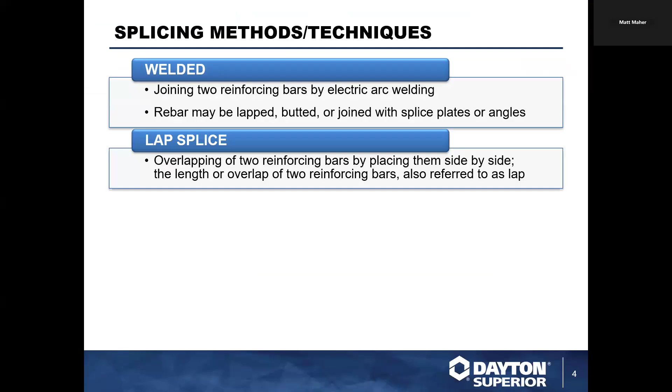The three main techniques we're going to see are welded, lap splice, or mechanical. Welded is exactly what it sounds like: you take two reinforcing bars, sit them side by side, and with an arc weld you join those two bars together.

They can be lapped, they can be butted, they can use plates or angles. It is an expensive process, it is a time-consuming process that I'd say is not as frequently seen anymore, but just two months ago I had a set of plans come across with welded splices that the engineer wanted me to review. So it's rare, but still out there and used depending on what the situation calls for.

Lap splice is the most traditional splice that we're going to see. That's what everybody sees in paving, especially a lot of wall work, anywhere. It's just the overlapping of two reinforcing bars where you put them side by side, and you have pigtails or tie wire or a max tie gun or a Cody clip gun that puts your two bars together. That is dependent on the size of the bar for how long that overlap is and what you need to develop the strength of the connection.

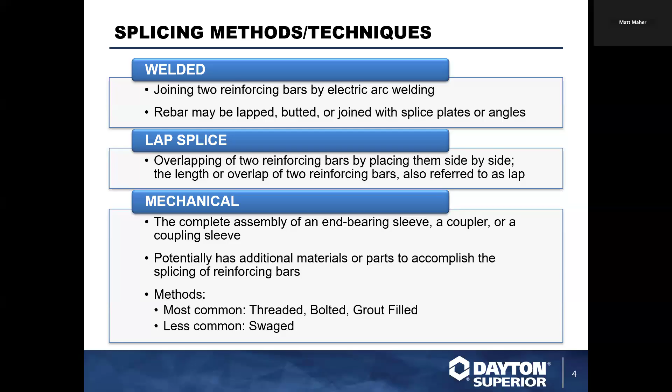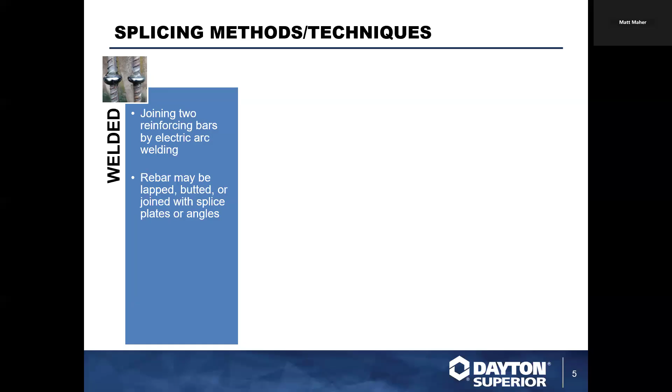There is one company in the market that uses that almost exclusively, but they've gone to some other methods as well. Just to give you some visuals and a couple more notes: for our welded splice, this is a picture of just doing it butt to butt, done again through electric arc welding, maybe lapped, butted, or joined with angles or plates.

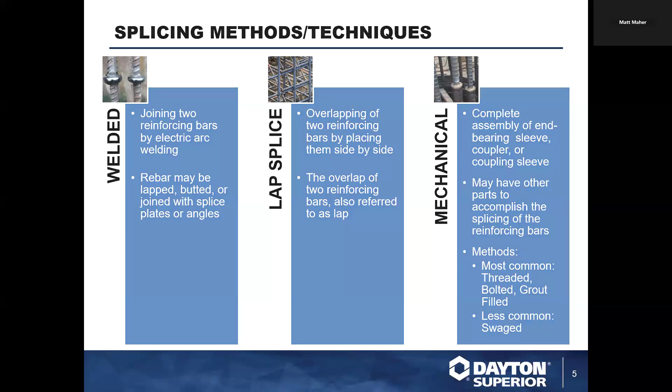Your lap splice is traditional, just side by side rebar with wire holding it together. And then you have your mechanical splice that uses a separate function. The one we'll talk about today is a threaded version. Most people are familiar with a bolted connection. There are also grout-filled connections predominantly used in the precast industry, and again the less commonly used swage.

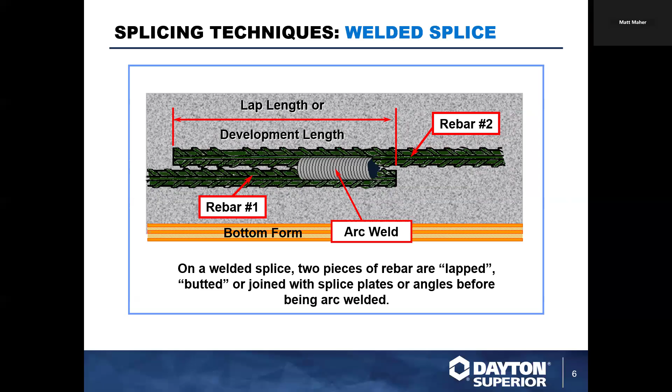So looking at an overview of everything here: welded splice, to walk you through it - rebar 1, rebar 2, put an arc weld after you figure out what the development length is. That weld would actually be almost the full length of that lap to hold those bars together. This is going to be dependent on how good your welder is and on the concrete that's holding it together. So those are things to consider.

Here again, a traditional lap splice held together by tie wire. You've got to figure out the developmental length for the lap to make sure you're getting full capacity of the bar, or as close to full capacity as you can get. This is highly dependent on the concrete and highly dependent on the installer, because some job sites I've been on put pigtails every 3 inches, others have tie wire every 10 inches, and some have one piece of tie wire holding bars together. It just depends on who's doing the installation that day and how many wires they felt like putting together.

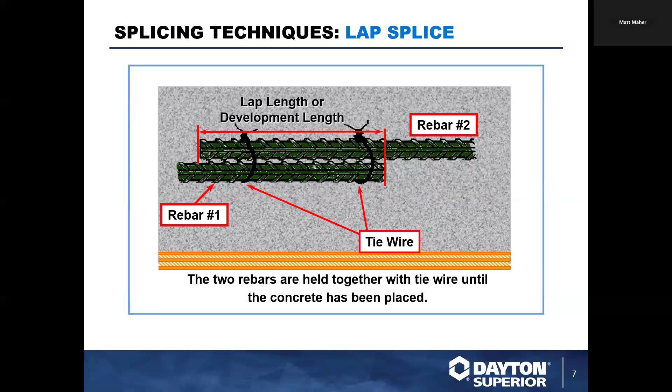There's no standard for how much tie wire should be at a given interval. So it's dependent on the installer and the concrete for how secure this is going to be and what kind of strength it gives your structure. Obviously, between those two, you can have some failures because they're dependent on the installer, dependent on the methods used, and dependent on the concrete holding them together. So some of the issues you'll run into are movement failures.

One of the biggest issues you'll run into with a situation like this is what we call rock pockets. That's where all the slurry from the concrete flows through, but the aggregate is held up by the rebar, and you get a weaker structure because the aggregate is part of the support and everything doesn't work together. You're not getting the right blend of concrete throughout the structure, so you wind up with weak spots and eventually a failure. Congestion is a big concern.

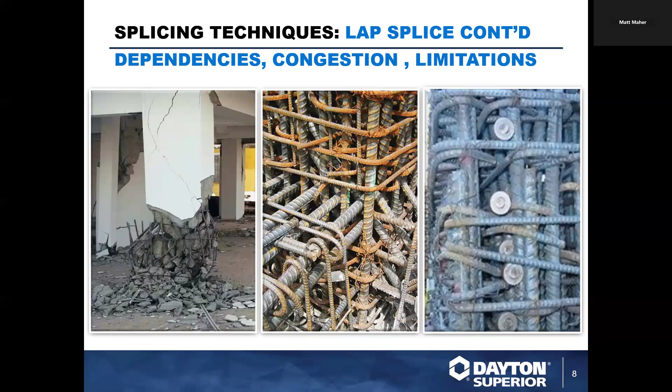It's becoming an even bigger concern as environmental factors come in and people are starting to look at carbon content and stuff like that.

So the answer to all of that, whether it's installer questions, concrete support questions, or congestion questions, is to use a mechanical splice — again, the complete assembly of an end-bearing sleeve coupler or coupling sleeve. Basically, a mechanical coupler allows two separate bars to behave like one large bar. If you have a drilled pier shaft with two 60-foot bars and you couple them together, they will act like one very long 120-foot bar.

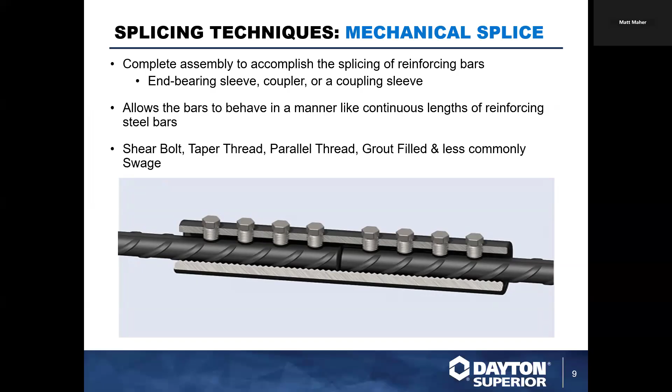Our most common methods are shear bolt, two threaded options of taper thread or parallel thread, and then grout filled and swage.

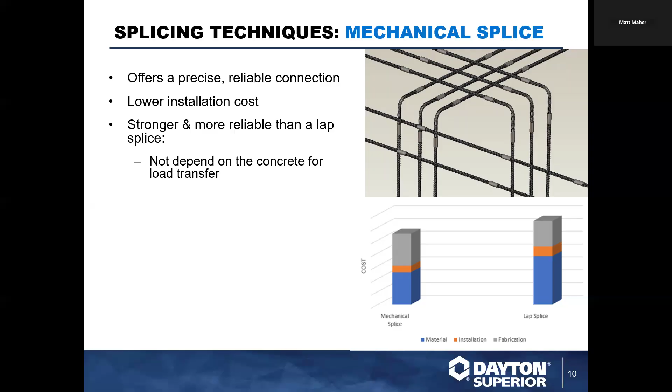The advantages here are that they offer a precise and reliable connection — the same connection every time. They have a much lower installation cost and a much more precise installation. They are stronger and more reliable than your other two forms of lap splicing, and not dependent on the concrete for load transfer.

That's a big thing. All, or the majority, of the testing for mechanical couplers is done in a lab outside of concrete, independent of any outside forces, so that we as a manufacturer, and whatever regulatory force is overseeing the project, are assured that the mechanical couplers will cause the rebar to act the way the rebar should, without variables dependent on any outside force.

As a result, you get a stronger connection, superior cyclic performance, and greater structural activity during seismic events. That's really important — the performance of mechanical couplers in seismic zones far outperforms regular lap splices or welded splices.

And this last note here is correct and not correct. So we're going to dig a little bit into the current situation.

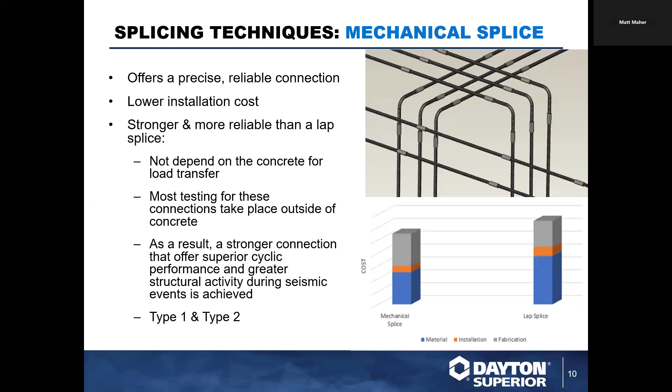Typically, for the last 40-ish years, there have been type 1 and type 2 connections for mechanical couplers — 125% of the yield of the bar, and 100% of the tension of the bar. So that's these two definitions here.

Type 1, as defined in ACI 318, is a full mechanical splice that gives you 125% yield of the bar. Type 2 gives you that same 125% of yield, but also gives you 100% of the tensile strength of the bar.

Now, why I say this is correct and incorrect is because at the beginning of this year, ACI 318-2025 came out with S, G, and L classifications and did away with the type 1 and type 2 designations for mechanical splices. In doing so, they kind of shook up the industry a little bit.

Currently, no manufacturer has any coupler that will meet a Class S splice as defined in ACI 318-25. The majority of us, including Dayton Superior, can comply with Class G, and we have several that can comply with Class L.

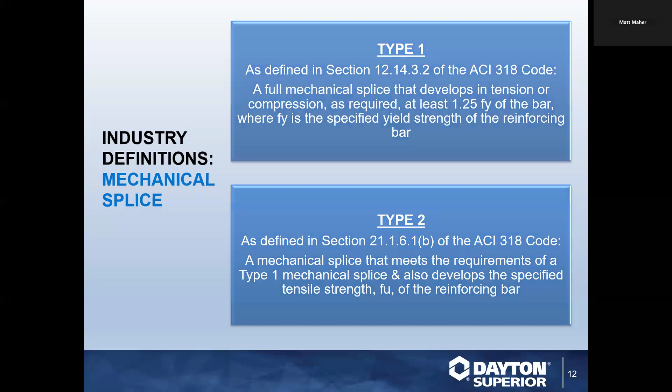But if you are an engineer doing everything to ACI 318-19 and previous, then you would still use type 1 and type 2. If you are designing to ACI 318-25, you would have to use Class G, L, or S. But again, nobody on the market has anything that will hit a Class S as it is currently defined in ACI 318-25. So hopefully that clears all of that up. If you guys have any questions about that, throw it in the chat and we'll address that at the end.

This slide shows how those ACI and ICC code requirements work together and what it means for the difference between a type 1 and a type 2. On grade 60 rebar, type 1 is 125% of yield, which is 75,000 PSI, and 80,000 PSI for type 2, which just means it takes 80,000 PSI to pull on a bar typically and get it to break.

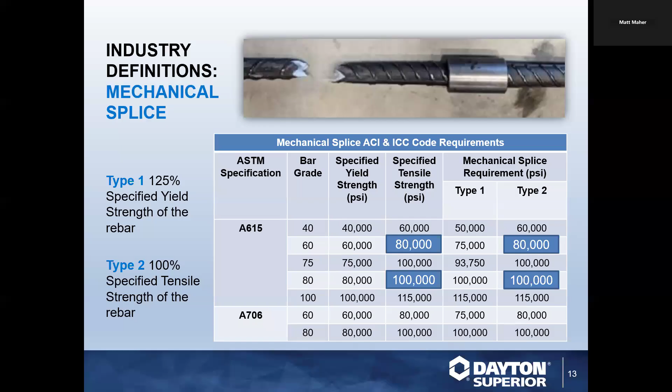So a mechanical coupler has to allow two pieces of bar to perform in that same method and not allow the two bars to pull apart in anything less than full tension. All DSC splices are good in both compression and tension. Compression is the force pushing on the bars, and tension is the force pulling on the bars.

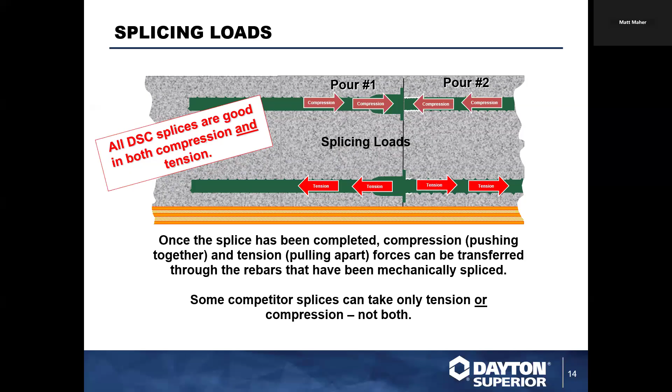Once that splice has been completed, the forces are transferred through the rebar that's mechanically spliced rather than through any other method. One thing to be on the lookout for when considering Dayton Superior versus anybody else on the market: several of our competitor splices can only take tension or compression. They're not qualified or approved for both. Again, all DSC mechanical splices are approved for both tension and compression.

So walking through some of the final definitions here, some general technical information before we get to the DBDI: what is yield strength? It's the stress to which a reinforcing bar can have a load applied to it and will stretch. Once the load is removed, it will return to its original length. It's designated by FY, and once it's reached its yield point, it's been elongated or stretched and will never return to its original length.

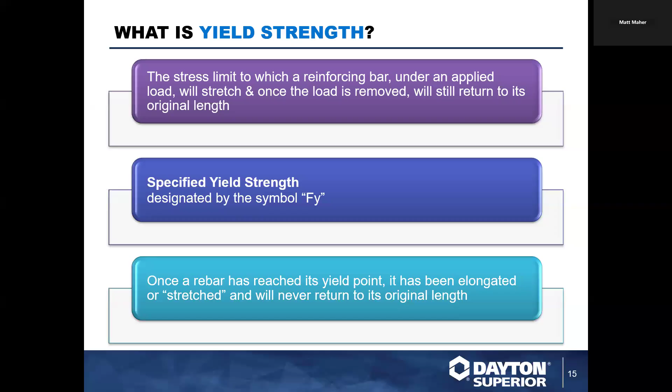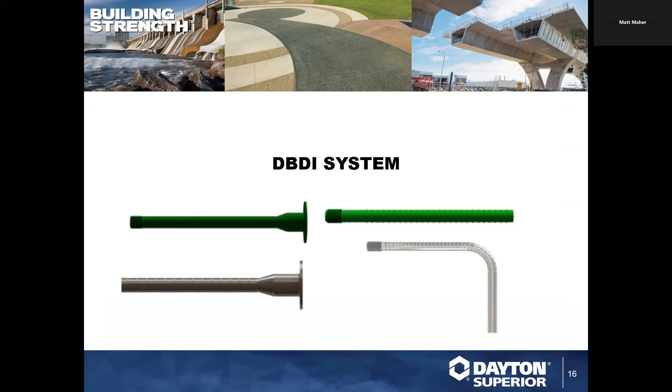You'll see what they call necking, which is rebar that has been stretched out and no longer looks like rebar — it's got a concave portion to it. That's all of the technical stuff, all of the humdrum, boring stuff. Now we get to the exciting stuff of the DBDI system.

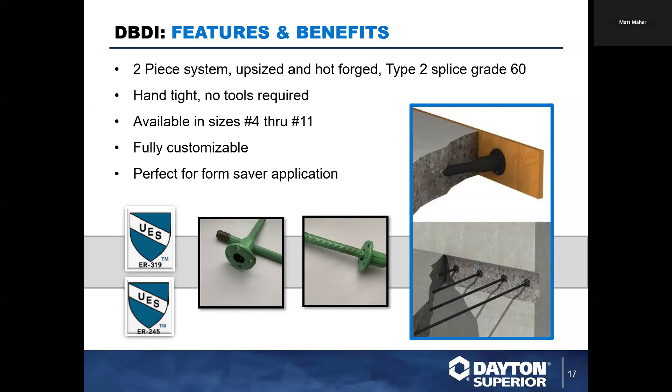The DBDI system is our parallel thread system. I would say it's our flagship parallel system. I love this system and the way that we put it together. It's two pieces, and the biggest thing I tell people is that the second part — it is upsized and hot forged. So everything you see here in these pictures and diagrams, these are all one piece of bar. The male side is heated and upsized, and then the thread is cut into it.

Same with the female side. That flange is not welded on, not tacked on, not screwed on or anything like that. It is one piece of bar that is heated up, the end is formed into the flange, and then it is tapped for whatever size rebar it needs.

Because of that upsizing process, because we take the time to do that, it does provide a type 2 splice for grade 60 on all sizes 4 through 11. So there's never a question of whether you're getting the full capacity of the bar, or the best mechanical splice for what you're trying to do. It is as strong as it can be, and as strong as a mechanical splice can provide you in just a two-piece system.

It's hand tight, meaning no tools are required. So it's a great option for projects with quick-moving parts where you've got a lot of guys on the ground.

Installers don't have to be trained. They don't have to have any special equipment. They don't have to know anything. You can just grab the guy that just walked onto the job site that day and tell him to start screwing these together, and as long as he gets them hand tight, he really can't screw it up.

They're fully customizable. We'll walk through that here in a second, but that means we can do a litany of things, from single-ended to double-ended to hooks, to a crazy Z-bar we see down here in Texas all the time that my customer service people love to encounter, with double bends in it and all kinds of things.

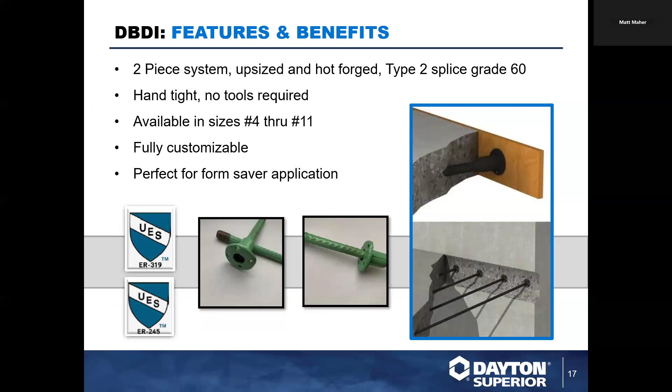Because of the natural flange that comes out of the forging process, this is perfect for a form saver application. One benefit, obviously, is it eliminates any of what you see here. It eliminates bars from protruding out of a wall. Those are a safety hazard. They're punching holes through forms. There's all kinds of issues that come along with bars sticking out of a wall.

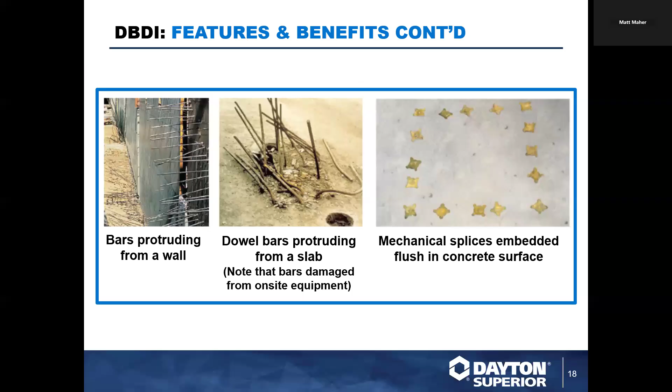Instead, you could have the picture on the right with mechanical splices embedded flush in the concrete surface. People can walk over it. People can drive over it. There's no safety hazards on your job site. Your safety inspector is going to love it. And when you're on to the next phase, you just pop in the male bars and you're good to go.

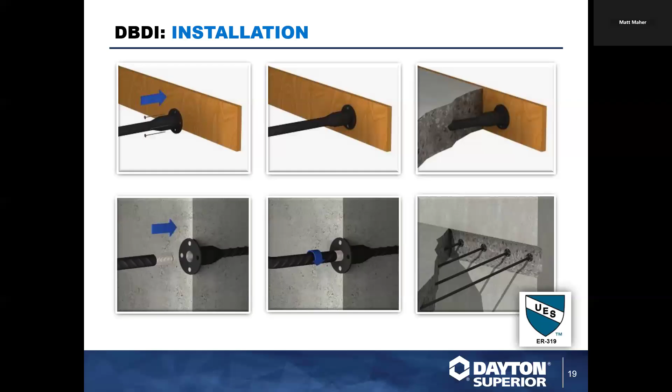So I mentioned earlier these are fully customizable. What exactly does that mean? It means that you can do whatever you want with it.

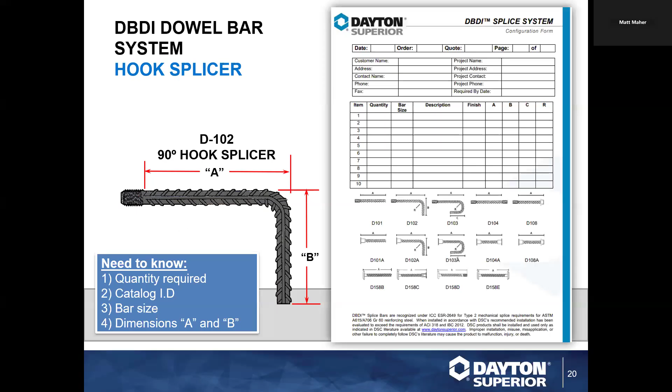So these are examples of hooked bars. This is a simple 90-degree hook bar, but as you can see on the order form there on the right, we can do 180 hooks, we can do males, we can do females, double male end, double female end, with end anchors, with bolts, almost anything you can think of. I've had people throw a lot of stuff at us and we've been able to do it. So there's not really any question there.

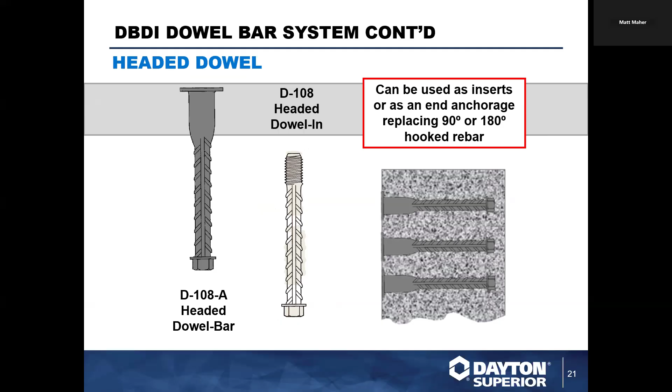One of the more popular things we see is a single-ended headed bar. This happens to be our bolt head version, used frequently in nuclear power plant applications. You can do that on a male or a female. We also have an end anchor version of it with just a regular end anchor on that. We'll get to that in just a second.

When we looked at what he was doing and how he was connecting it, the easiest and best solution was to put D104A double-ended splicers in the cavity he had, let that be poured, and then he could come back with males on the other side. This allowed his project to streamline installation speed and reduce congestion.

Never hesitate to reach out and say, hey, we're running into an issue, we've got a question, can you guys help us figure this out? I always joke when making presentations that I may not be an engineer, but I've been around enough of them for the last 15 years that I can speak the language and usually help. Then you've got guys like Sean on the call who can talk a lot more engineer.

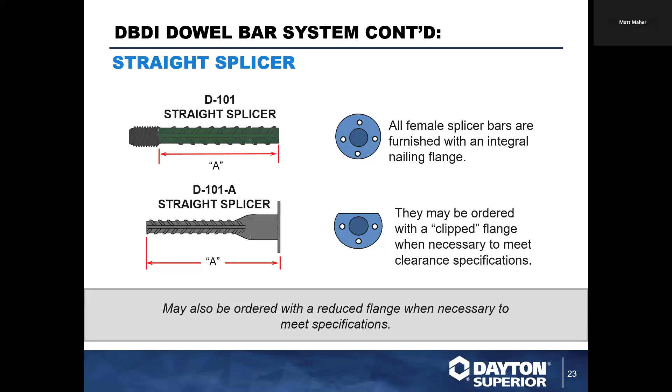So straight splicers, these are our bread and butter. These go out every single day across the country and across Canada. Our D101 and D101A, all of the female splices have this integral flange that's just a natural part of the forging process. We can also do it with a clipped flange if you need that to hit some clearance specifications. These are easy to roll off the line in standard lengths - 18, 24, 36, 48 - and they can be done up to, our handbook says, 40 feet. I'll tell you from conversations I've had, they don't like to do them over about 35 feet, but I've gotten them to do longer. Most of the time you don't need that, but you can get these in pretty good lengths as you need.

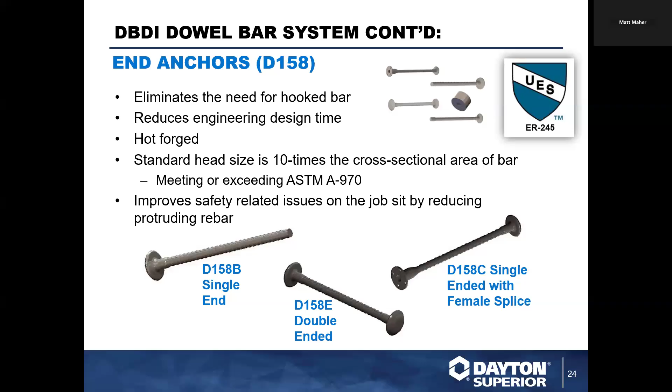The standard head size on these is 10 times the cross section of the bar, and it meets or exceeds ASTM A970. If you have any questions about code compliance, you can reach out to myself or any of the other TSRs and we'll help you with that. This also improves safety-related issues - you don't have protruding rebar, you don't have hooks everywhere, anything like that.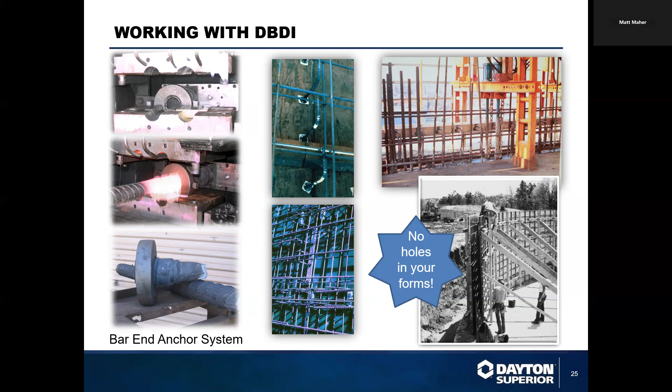This is just some photos to show you exactly what we're looking at when we talk about that heating and upsetting process, the forging process, and some of the customizations we can do. You can see in the center those are double females, for either a ladder application or just for needing multiple bars connected in close succession. We can do those double females, all kinds of options available to you with the system.

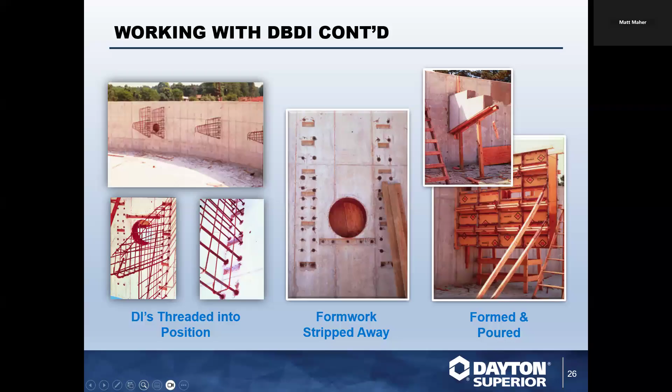You see a lot of these products being used on wastewater treatment plants and parking structures.

So what we have for resources, we've got on our website at DaytonSuperior.com all of the product pages for all the products we've talked about here today that Matt alluded to, with dowel bar D101s, the D108s, the D101A, etc. All of these are readily available, along with tech data sheets.

We also have a handbook that's real handy to come by, which you can download off of DaytonSuperior.com, as is the order form. This actually helps if you've got projects you're working on, enabling, especially, that there's no confusion between customer service and the estimator as to what they're actually looking for.

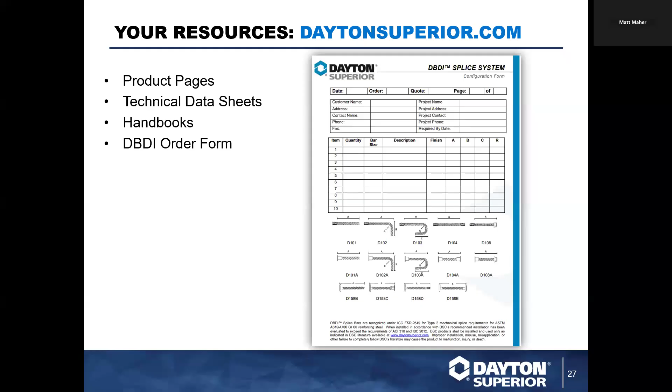How do you get a hold of, Matt referred to call him or call any of the other technical service reps. If you look on our website, we have interactive maps depending on your region of the country. You can click on it and contact, you'll see who your splicing representative is, whether it be Mike Best out on the West Coast, Matt here in the Central region, or Sam Connolly up in the North on the East Coast. These guys are all here primarily just for splicing products.

We also have all of our compliance letters. A lot of letters have to be required if we need specific letters written for the job site. We can produce those here, and as long as we can meet the specification, we can supply you with the certification letter for it.